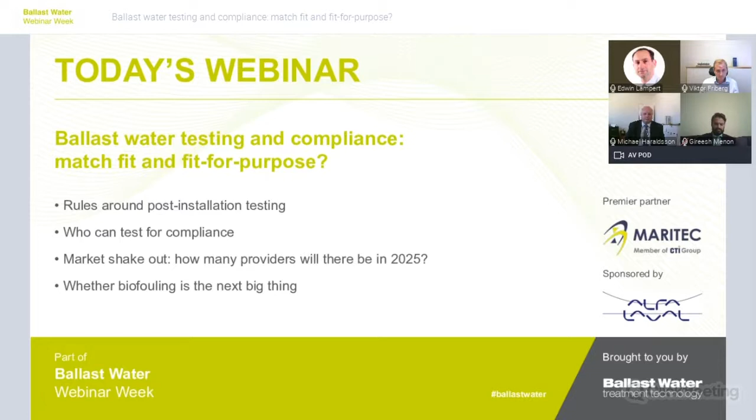Speaking of today, this is the ground we will be covering. We'll look at rules around post-installation testing, who can test for compliance, the market shakeout, how many providers will there be in 2025, and whether biofouling is indeed the next big thing.

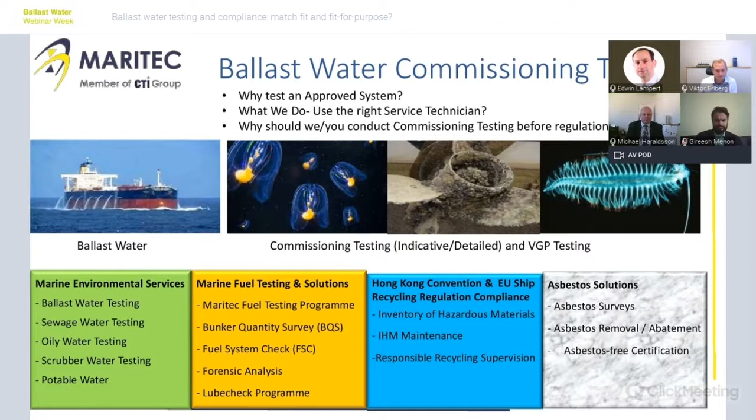Why test an approved system? Well, you don't test the approved system because it is already approved, but it is the commissioning testing. And in the little time we have been involved with, we already know that a lot of owners don't understand how strict the regulation can be, or is, and how difficult it is to actually have the system approved. Having said that, the regulation of mandatory testing was supposed to come into force in October next year, but because of COVID-19, it has gone to May 2022 probably. But having said that, there's a few flag states that have already decided that you have to test your system if you install the system now.

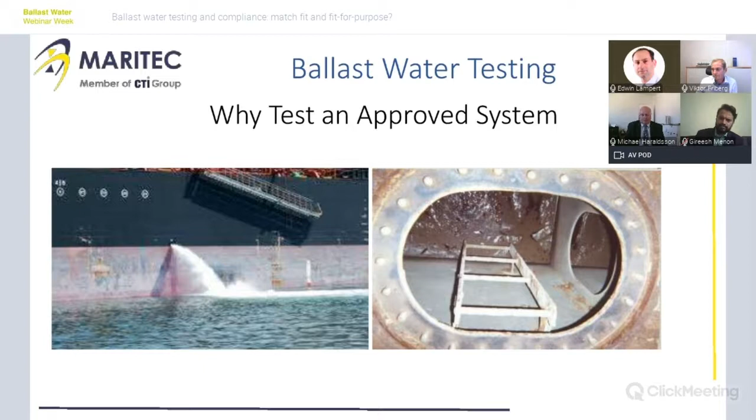We believe that because the regulations are so strict, it's very important that you have experienced technicians come on the vessel to take the samples, and even more important, if the indicative testing has failed, you have to take the samples to the lab. That's why we have all our technicians, ex-seamen, so they know how to handle themselves on a ship. By doing this, we know that we can secure the whole chain.

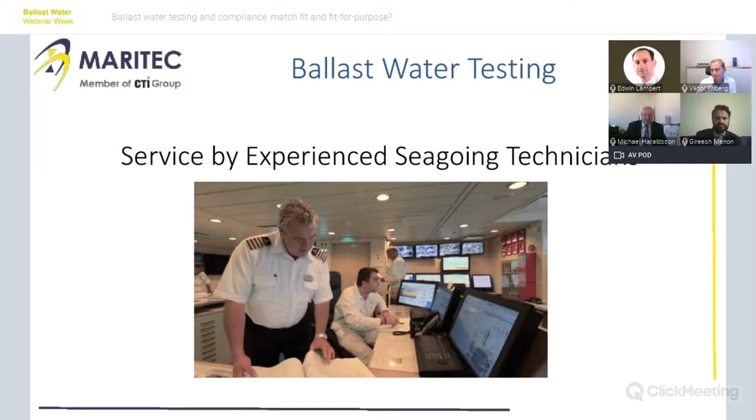So who can do this testing? Any testing company can do it, but to not have a flag state or a charterer hanging over you, you can get it approved by, for the moment, DNV, Lloyd's, and ABS. And then they will say that we have approved your supply operations.

So far we have got DNV. We expect ABS and Lloyd's later this month. But here also you can see a few certificates that we have as our QC.

So, like I said, this is very strict regulations. And what we're doing is not just because we are testing it, but if you install a ballast water treatment system now, especially retrofit, wouldn't that be nice after you have installed the system, before you leave the dry dock or repair yard, that the system is actually working?

Because what would be worse, unless you test it, you leave, you go to the first loading, and that port authority decides, well, we're going to test the ballast water treatment system, and it failed. You're going to be kicked out, and now you're going to have to contact the charterer and say, well, sorry, your cargo is going to be delayed.

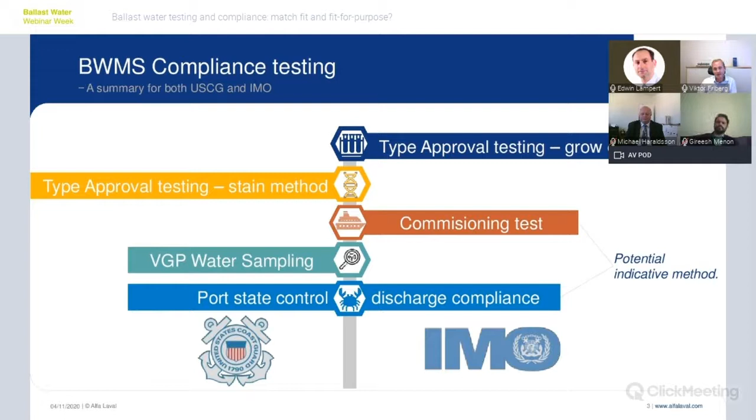And this is where we potentially now will see these indicative testing methods. As you can hear on that name, it's only an indication whether the water sample is compliant with the convention or not. And this is what we will focus this presentation about, these indicative testing methods and what we see in that arena.

So if we look at commissioning testing and also potential various compliance testings to be carried out in the future, it's important to note that these are done to verify installation and, in the future, also crew's ability to handle the system in the correct manner. And this is exactly what Michael mentioned as well.

So, in other words, the commissioning sample is there to indicate if the engineering work has been done properly, if you have prepared for the installation, and if you have done the actual installation in a correct manner. And I can assure you, if this is not done correctly, then you can have chosen the best system in the world, but the water that you discharge will still be out of compliance.

From our experience so far, the engineering work is really where everything starts, and this is vital. You as a ship owner should minimize any dead ends and ensure that you have the correct sampling points, etc. From Alfa Laval's point of view, we recommend that any engineering company you choose must have been trained by the manufacturer itself. We also recommend that you ensure the manufacturer is doing an engineering review of the drawings that are submitted, because there's so much experience from the manufacturer that needs to be taken into account to make sure installations are done successfully, and therefore also the later tests become successful.

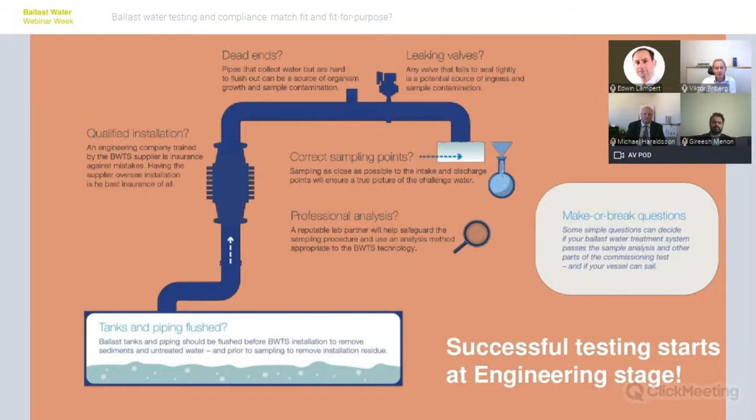When it comes to choosing a testing method, there are a lot of things to consider to ensure that you have a testing method and equipment suitable for your chosen ballast system. The good thing is the industry is working hard on finding good solutions for handheld devices that can easily be used on board. On the other hand, there's still a long way to go until we have something fully functional for the industry. None of these methods have yet been validated in the environment they are now to be operated in. So in theory it's fine, because we're talking about indicative testing, which should give an indication.

However, what we see today is the industry is not really treating this as an indication, but instead as a fact, which for many operators becomes very costly, since samples many times have to be retaken or sent for detailed analysis. Some of you may have seen that one of the biggest testing companies released a white paper this year on commissioning testing and their experience so far.

They reported that when they did both indicative testing followed by detailed analysis of the same test, as much as 54% of the tests that failed in indicative testing were proved compliant on detailed analysis. This really proves the uncertainty of these types of tests, and that we as an industry really need to work together to find efficient and reliable methods to ensure the convention is fulfilled.

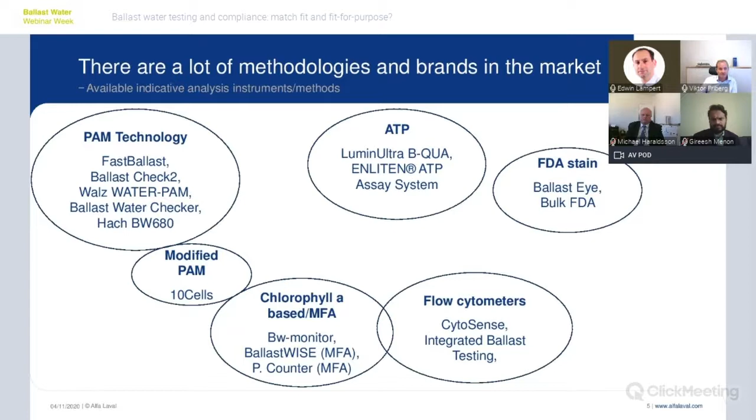If we look at the timeline, for most ship owners there's still some time, because the earliest implementation from the IMO point of view will be May 2022. However, we've seen a few flag states that have already started, including Cyprus, Singapore, Australia, and Greece, for example.

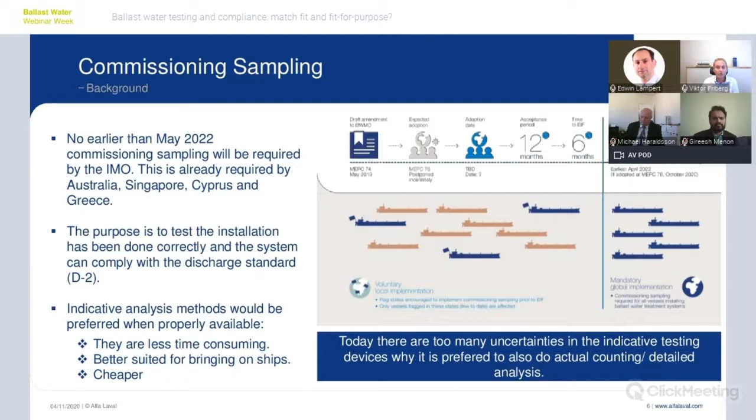If you're flagged with any of these, you need to carry out commissioning testing. But we believe most flag states are on a kind of holding position until the next MEPC to see what comes out of that, and most likely a lot will decide on their way forward after that. But from an IMO point of view, May 2022 will be the earliest enforcement of this.

As a summary and conclusion of my presentation, we really urge you as a ship owner to start early. Successful commissioning sampling really starts already at the engineering stage, so make sure you flush your pipes and clean your tanks before any installation.

We believe that indicative devices still have reliability challenges and must be used with caution when checking for compliance of the installations, but we think there's a very positive atmosphere in the industry to get there.

ISO guidelines on how to actually validate these indicative instruments and compliance monitoring devices are under development, and we expect that IMO will either implement the same or come up with something similar in due time.

Last but not least, I think the industry must work together, and we from Alfa Laval really welcome improved indicative measuring devices. We are happy to make our systems available for any kind of validation studies, because we believe this is an important topic for the industry and we need to get it right. And with that, I say thank you, and over to you, Edwin.

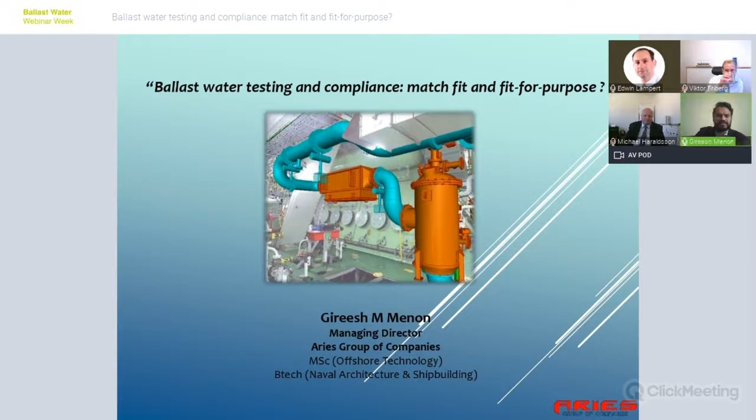I represent Aries Marine. We are one of the world's leading retrofit engineering service providers. As Viktor mentioned, engineering is a critical part, and experience is what matters. We have done more than 800 ballast water retrofit engineering projects, with 3D scanning and engineering teams all over the world - Middle East, Mediterranean, North Europe, China.

Our experience covers all different types of vessels. More than 35% is oil product tankers, 25% containers - a mix of all different types, and also different treatment systems, with UV being a major portion at 60%. A major chunk of that we would have done with Alfa Laval, so Viktor, that's a big share of this for us.

Once we go to the engineering workflow, it starts in the pre-survey concept study part, right through 3D scanning, concept design, and basic design, where the maker specifications and maker's approval is also an important stage when the basic design is completed. Once the class rules and maker specifications are followed, we go into detail engineering, and finally site supervision and commissioning.

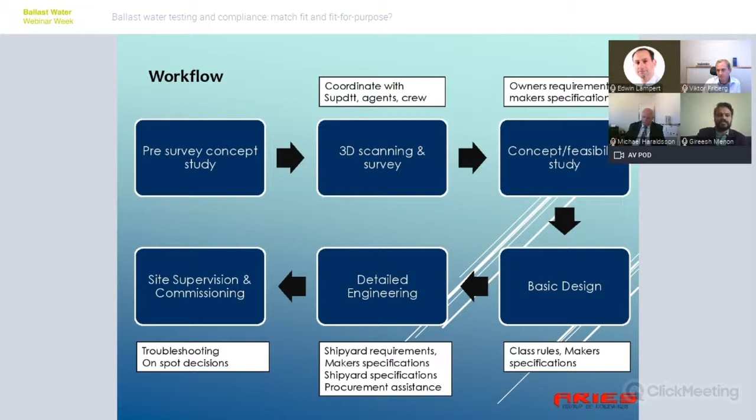It's critical that the engineering company involved has knowledge of what goes wrong or what issues arise during installation and commissioning, so that the design caters to all these factors. We have worked with a lot of system makers - so many now have approved systems and installations all over the world, in almost all parts of the world.

Ballast water regulations have had a long journey so far, from 2004 when it was adopted, through various milestones in 2009, 2016, and 2017 when the regulations finally entered into force. We just passed another deadline, 27th October 2020, when the BWMS code became mandatory. But the end of this experience-building phase that IMO has projected will be sometime in 2022, 2023, which just goes to show the huge amount of learning the whole industry has had, from before 2004 up till now.

As we have heard from my co-panelists, there is a lot to learn. Although the equipment manufacturing side has become mature in the past few years, there are still a lot of things to learn, because we are now into the commissioning and testing phase, where the owners will realize what they have spent all this money for in the past few years.

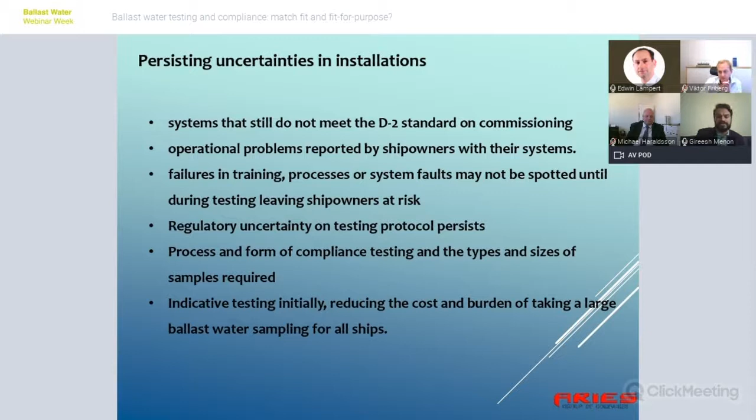Also in the testing protocol, there is still regulatory uncertainty - the process and compliance testing, and different types and sizes of samples required. These are still areas of uncertainty and a lot of learning required. In sampling, there are possibilities of high margins of error and inconclusive results. When will this trigger a full sample testing? These are all issues we will be facing.

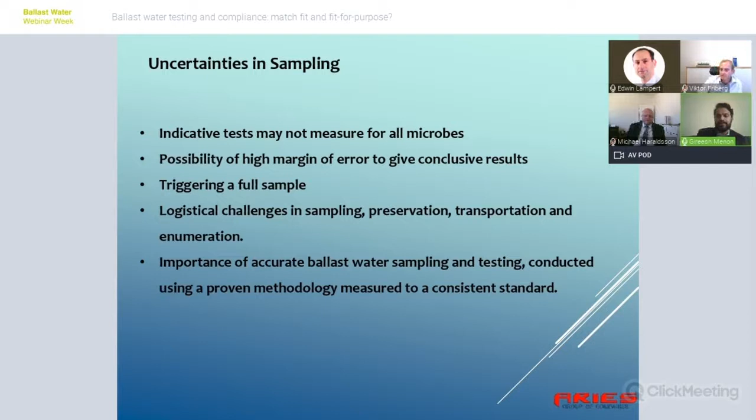Also, the logistical challenges in sampling, preservation, transportation, enumeration. This all reinforces the fact that it is very important to find the right companies to undertake the testing.

Before we go into this, it is important that we have the right system installed, a system with a very proven track record, and engineering carried out by a technical team with good experience, utilizing the learning curve of past many years. It doesn't seem right that after so many years we still continue making mistakes on installations or equipment. So all that experience everyone has gained has to be put into effect.

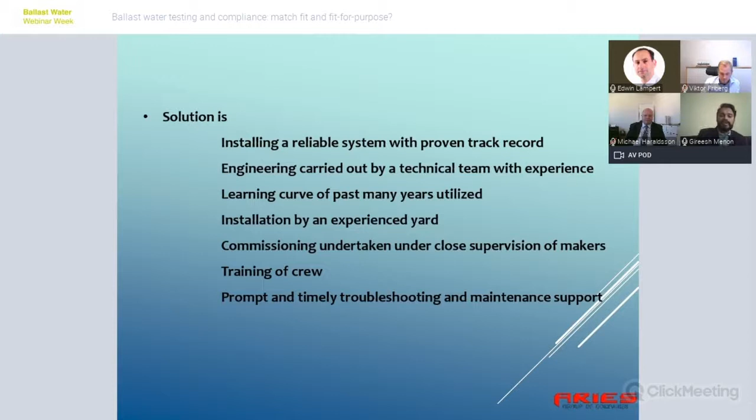Commissioning should be undertaken in close supervision of the makers, with training of the crew, and of course, timely troubleshooting and maintenance support should be provided by the equipment manufacturer for all cases.

Of course, COVID-19 has had an impact. Shipyards' capacities were down. There were scarcities in logistics and arranging engineering and commissioning engineers.

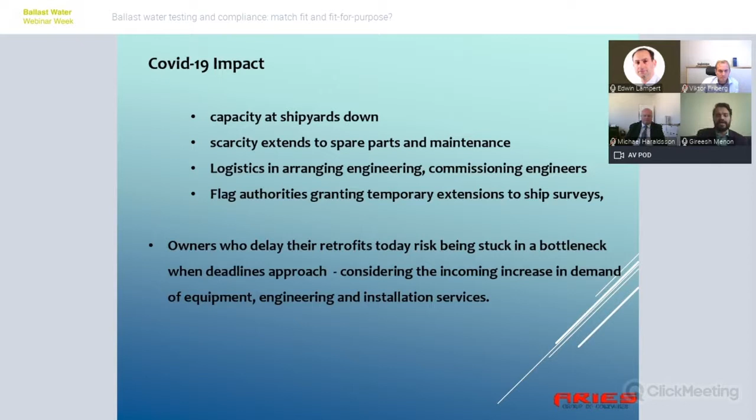So all this has brought out the fact that the companies that will remain in, say, 2025 will be the ones who have a wide network of personnel who can support ship owners throughout the many years, the challenging phases that are still yet to come, and also the right engineering partner who will have the whole range of activities and a wide reach, which will help us reach all parts of the world. So from my side as an engineering firm, these are the important factors for choosing the right engineering partner.

Expertise and presence in key shipping locations, which came out very clearly during these lockdowns due to COVID. So having a presence in different parts of the world is an important aspect. Liaising with class societies and makers, and manpower availability right up to the commissioning stage - these are all important factors in choosing the right engineering partner.

And this is another thing - biofouling regulations that could be coming up is something that impacts ballast water management. Right now, biofouling management is not part of the ballast water management convention, although it is also a contributor to transfer of invasive aquatic species, which is why the ballast water regulation initially came in. But IMO needs to address all these uncertainties with ballast water management before going into the impending biofouling regulations.

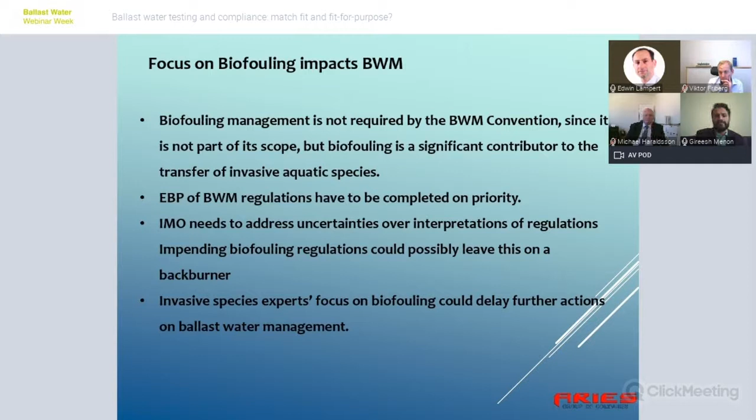And the worry is that the concentration or stress on these biofouling regulations could leave the ballast water management aspects still to be clarified on a back burner. So that's also something that has to be looked at. Just wanted to touch upon that point also. Thank you from my side. Over to you, Edwin. I hope I was able to clarify.